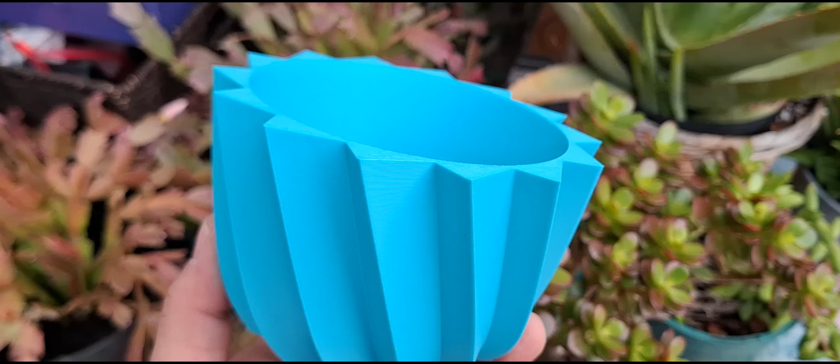In this video I want to show you how I go about making a plant pot. This is a very simple to follow video, and this is the base of how I make most of my plant pots. If you learn this technique, you can modify some of the steps and get different results. So let's get on it.

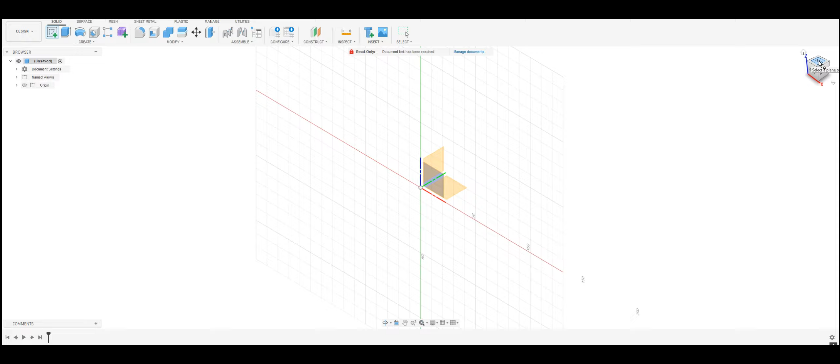I want to start with a sketch. I'm gonna make my sketch on the top plane right here, and I'm gonna make a circle somewhere about 80 millimeters. Now this circle is only a guide to help me get these lines in place.

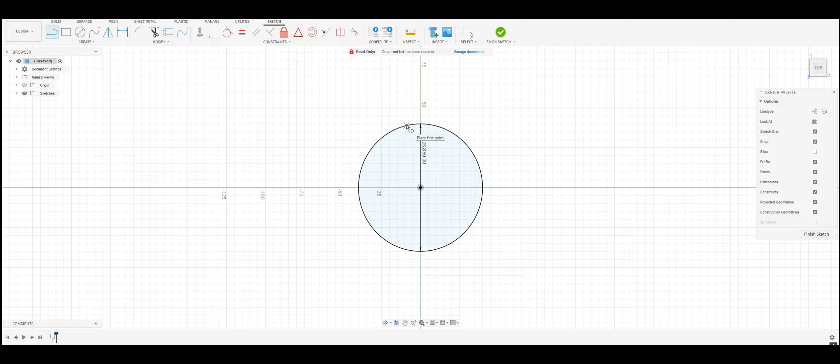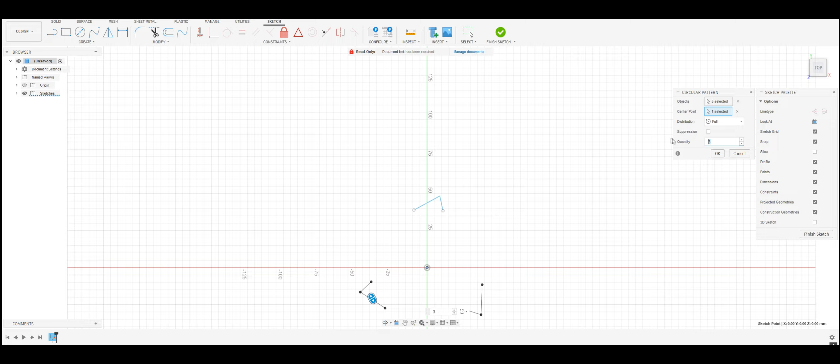So these are the lines that are gonna create the ribs of the pot. Now I've created these two, I don't need the circle anymore. I'm gonna select everything and create a circular pattern with the center point in the middle, and I want somewhere around 14 of them.

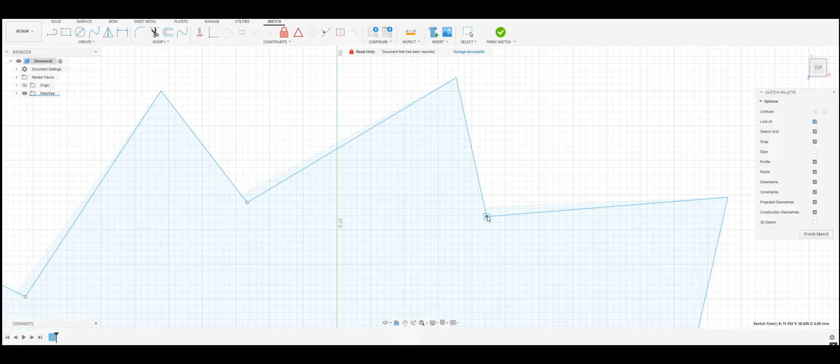Now, because all of these lines are intersecting, and I don't want that, what I want to do is grab this dot and move it on top of the other one, and that will give me a beautiful enclosed pattern.

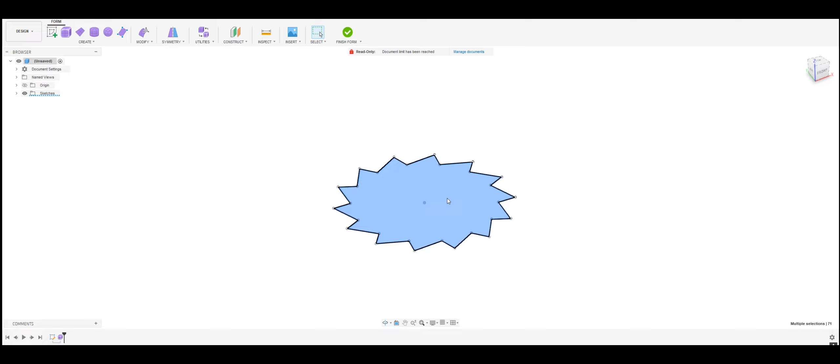Let's finish the sketch and then let's go to create a form. I want to select everything but the middle, so I'm going to do that by holding Ctrl and click on the middle, and then I'm going to create an extrude.

My extrude is going to be around 80 millimeters, and I want to add another face right here on the front face, so I have two faces. Now we're going to check if we have only one body, and we do.

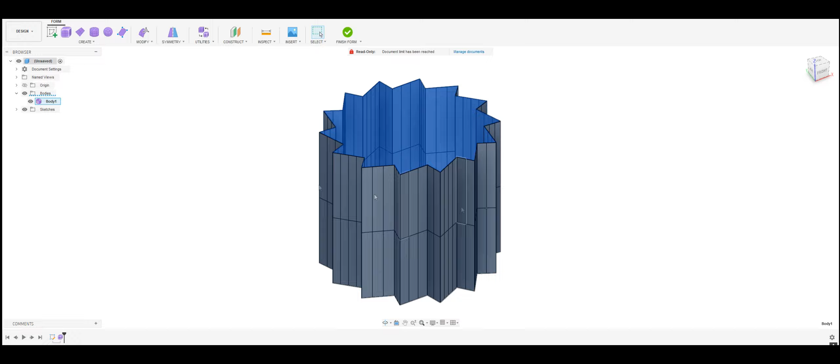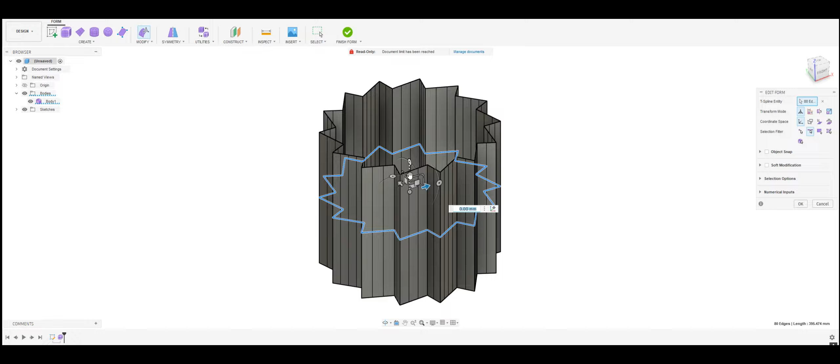I want to start modifying. I'm going to select this tool here, the selection filter. I want to select the edge, and double click this edge. First of all I want to drop it down a bit by pulling onto this arrow, and if I spin around, I want to make it slightly bigger.

That's going to give me this. And maybe a little bit more bigger. And then twist it slightly. Now it's going to give me this.

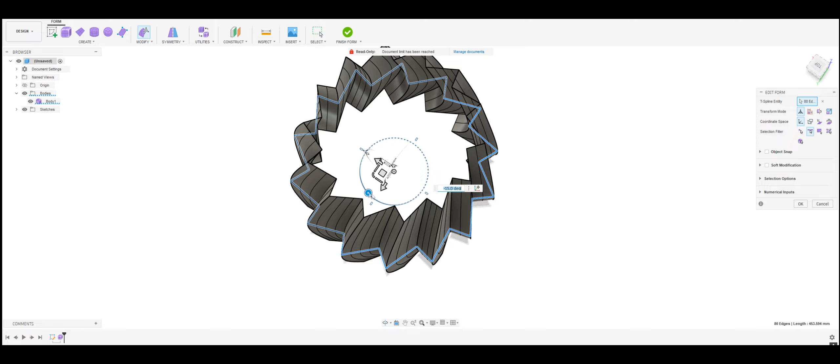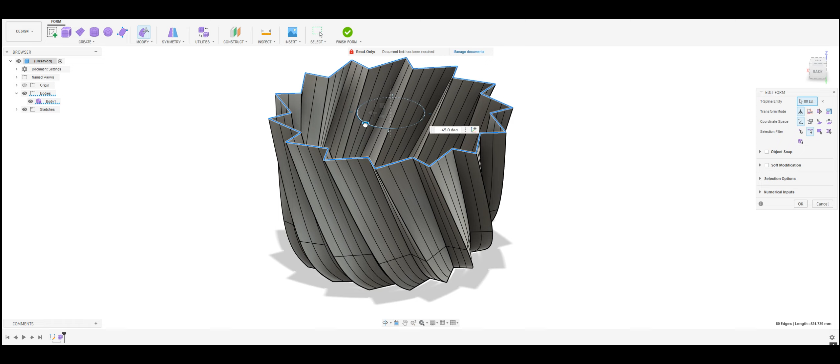I want to do the same thing with the top. So I want to double click on the line, select the top, make it slightly larger and twist it. That gives me a pretty decent looking plant pot.

Now let's finish the form. What we have here is a plant pot without thickness on the walls and without the bottom.

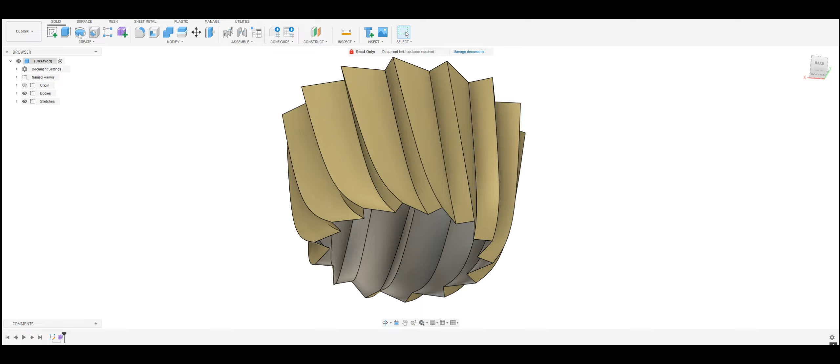So let's fix that. Let's go to surface and patch. We're gonna patch the bottom and we're gonna patch the top.

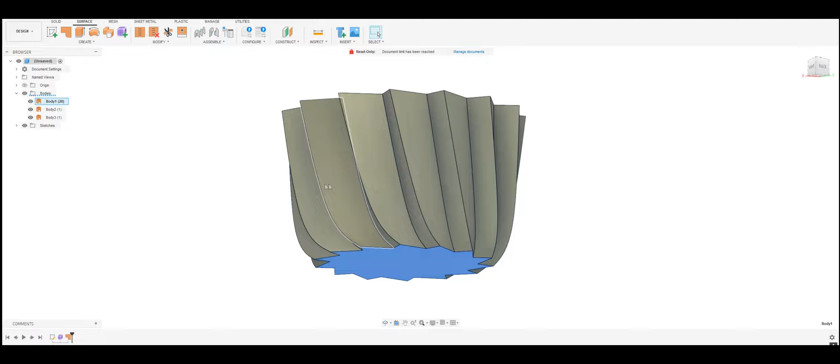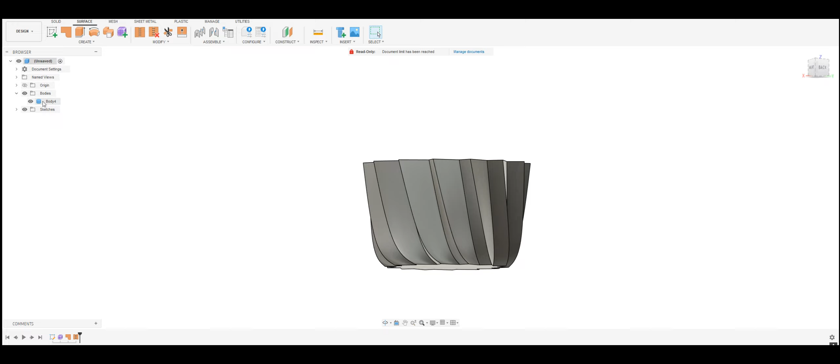Now we have at this point one body, which is the body of the pot. We have a bottom and we have a top, but these are not connected to each other. So if we select everything, we can just stitch them. Now we have a solid body with a top and a bottom and everything else.

Now there's a couple more things we need to do, and first of all is create a space where we can pot our plant. So we do that by looking at the middle of the pot.

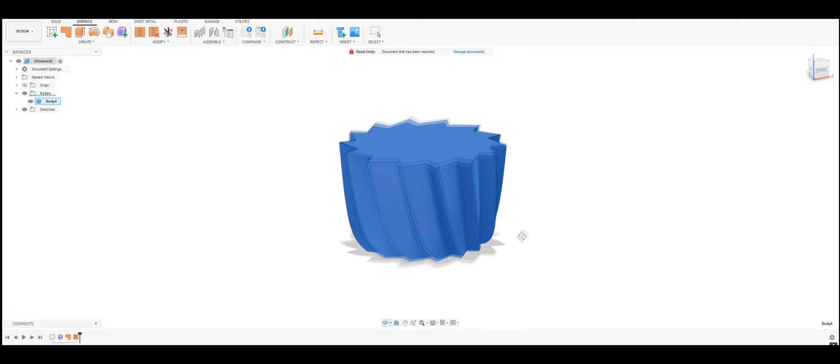So we're gonna inspect, we're gonna look at the section analysis, and we're gonna take one of these planes. So what that does is look at the middle of the object through this plane.

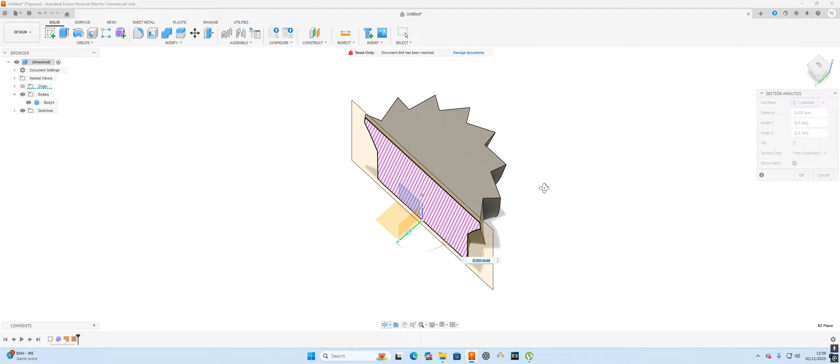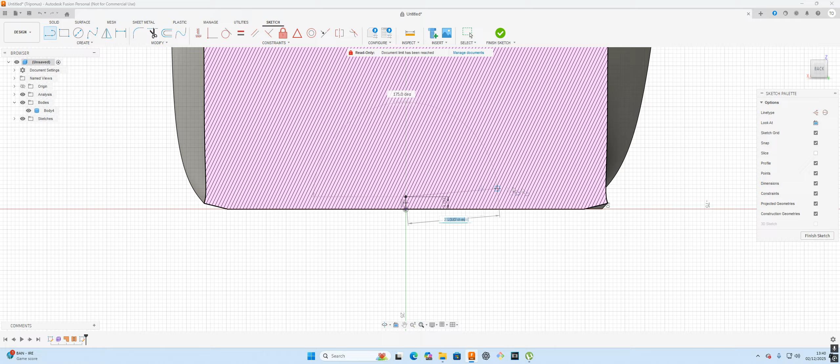So what I want to create now is a sketch onto this plane. I want to take a straight line and go up 3 millimeters, that's going to be the thickness of the bottom of my plant pot. Then I want to take another line, take it like that, somewhere there. I'm going to take another line, take it somewhere here, one here, and then we're going to take another line from this point and go all the way up.

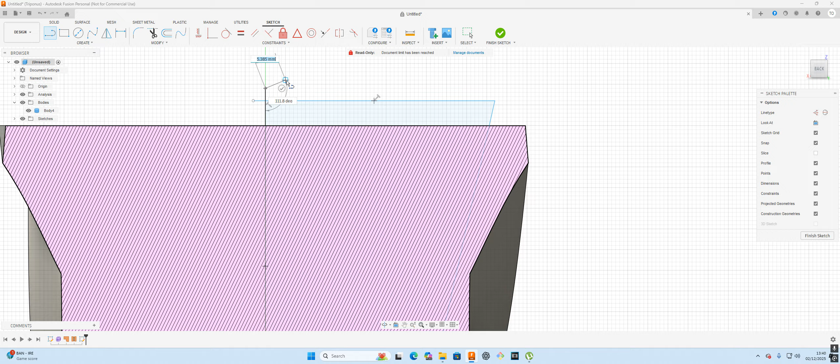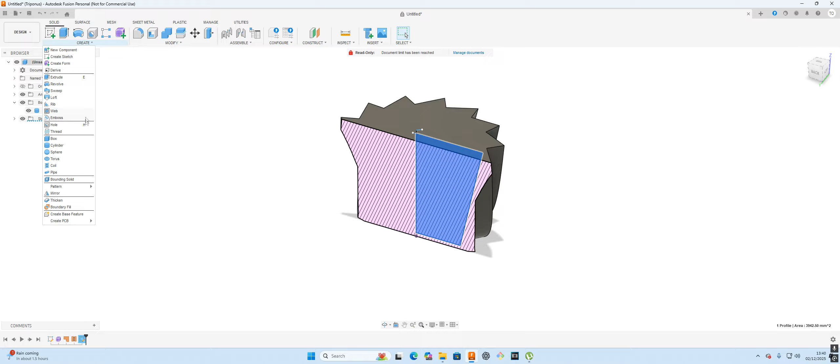That's it, I don't care about these lines anyway, so I'm going to leave them there. What that gives me is a profile that I can simply revolve around this axis and say okay. Now that kind of cuts into my pot, so let's fix that.

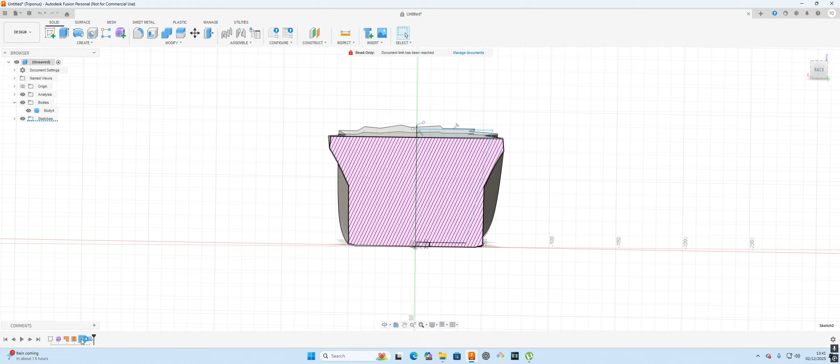I'm simply gonna go to the timeline, go to my sketch, grab this point and just drag it around here somewhere. Finish sketch, and that should solve all our problems.

Now if we hide the analysis, you see we have a beautiful plant pot ready to send to print.

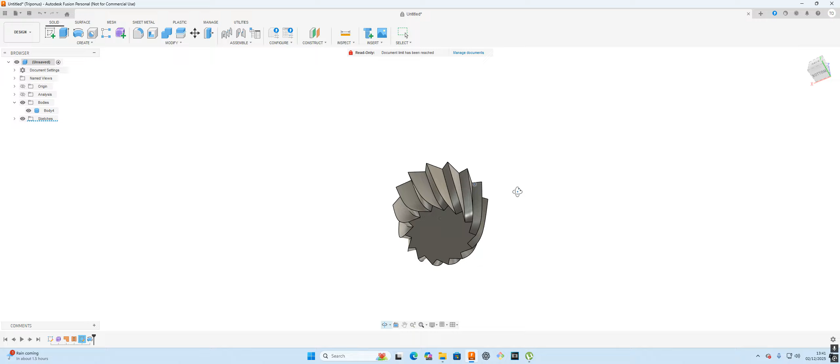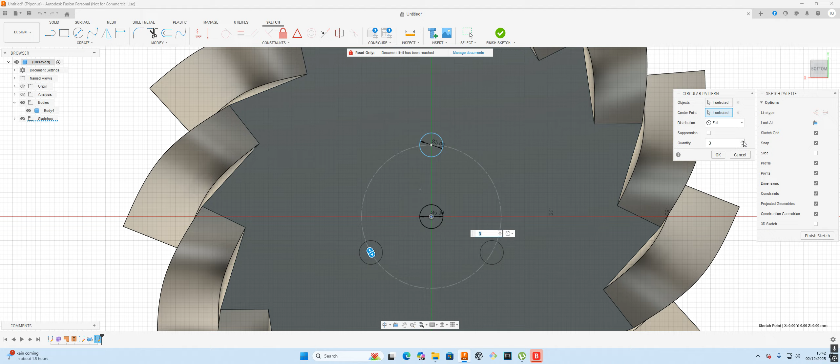There's only one thing I would like to do extra onto this pot, is to make some holes into the bottom for draining water. I'll do that by creating a sketch and create a circle about 5 millimeters, and I'm gonna do another one somewhere here about 5 millimeters, and take this circle and create a circular pattern with a center point in the middle. That's gonna give me 3, 4, 5, 6, and say okay.

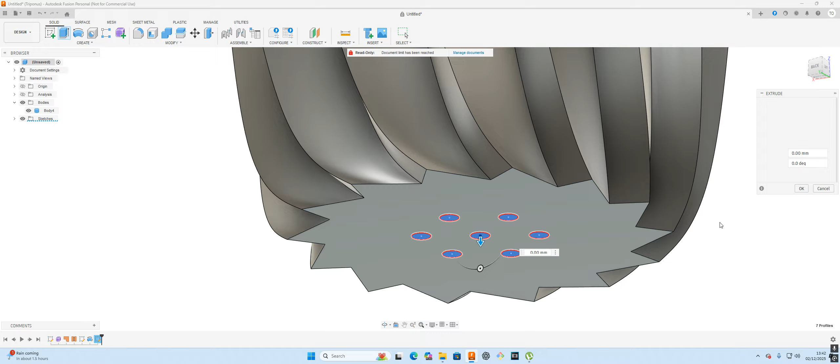Now I'm gonna just select, holding shift, select every one of them, and say finish sketch. Oh, I didn't select this. And then extrude by -4. That gives me this beautiful pattern on the bottom of my plant pot, and now my plant pot is ready to send to the 3D printer.